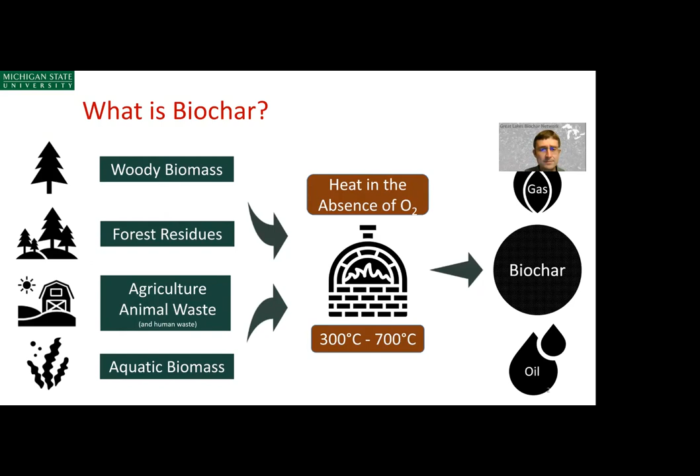As we move up this temperature range into the 400 to 600 degrees C range, this is where the technologies of pyrolysis are employed. They can be employed as either fast pyrolysis, which rapidly heats biomass in the absence of oxygen, or slow pyrolysis, which much more slowly heats biomass in the absence of oxygen for much longer residence times. Fast pyrolysis residence times are on the order of seconds or less. Slow pyrolysis residence times can be minutes to hours to days.

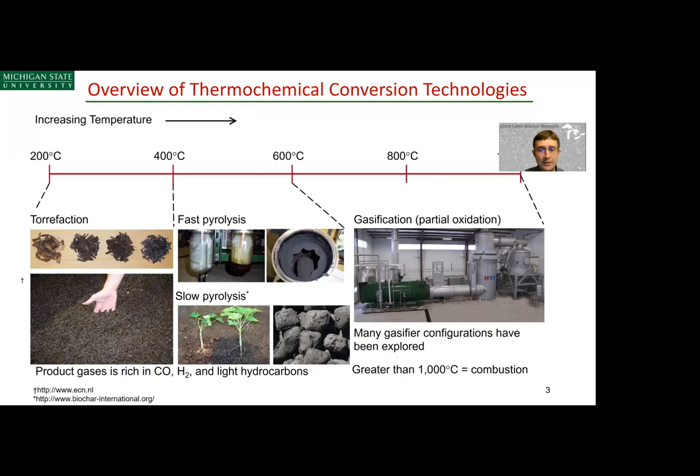So focusing on pyrolysis, this begs the question: how does pyrolysis occur? The truth is the mechanism is very sophisticated. Pyrolysis reaction chemistries are quite complex. There are a number of different reaction pathways followed from the carbohydrate polymers of biomass, including cellulose and hemicellulose, as well as the lignin component of plant biomass.

Fred Shafizadeh proposed a model in the late 70s, early 80s that describes wood pyrolysis. He suggested that pyrolysis proceeds via three routes: one route to char, which is our interest here today, another route to tar, now named bio-oil, and a third route to combustible gases. These combustible gases are sometimes called non-condensable gases - the gases left over after you've condensed the pyrolysis vapor to form bio-oil. There are also routes from the bio-oil to combustible gases and to char, so there are secondary routes that can produce more biochar and more combustible volatiles.

So this mechanism was useful because it helped us untangle what might be happening during pyrolysis mechanistically. Though today we've made rapid strides in our understanding of pyrolysis, we still have a ways to go. We care about these mechanisms because if we know the kinetics - the rates at which reactions occur - we can use that information to better design our reactors.

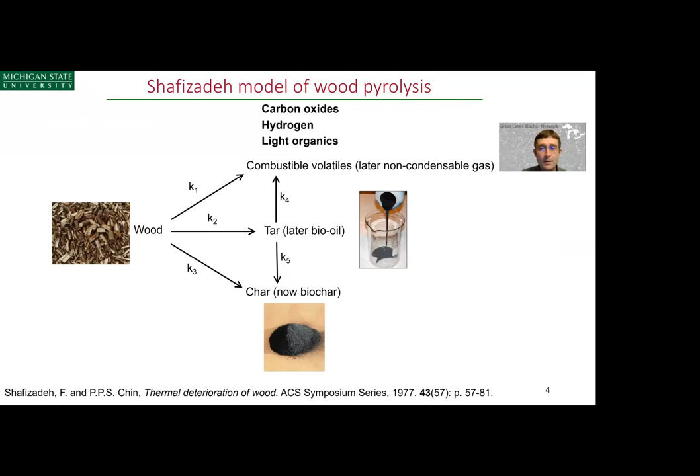Now we couple these rate equations that we can formulate from the kinetic models with heat transfer rates and mass transport rates. When we do that, we can better understand the entire physical chemical process of pyrolysis.

It's important that we understand these mechanisms, particularly the rates at which these vapors move through the char layer, because embedded in that char layer are the metals the plant had transported from the soil. Some of these metals are quite catalytic and can catalyze a number of other reactions that proceed to form products collected in your pyrolysis vapor, or they can catalyze the formation of chars. Understanding what's going on is really important because now we can design better reactors using that understanding. It helps us de-risk reactor design.

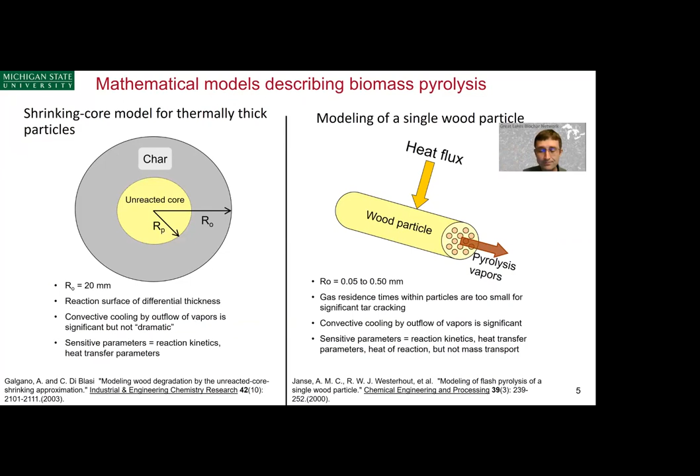I'll point out these earthen pit kilns are covered with soil, usually sandy or loamy soil. It's important to make sure that as this kiln operates, recognizing that the biochar volume reduces, you fill in any cracks or fissures that form, because those cracks and fissures will allow fresh air to infiltrate and cause combustion to occur. So this isn't something that can be done for 20 to 30 days without monitoring. It does take frequent monitoring to make sure that anoxic conditions - those are conditions in the absence of oxygen - are held.

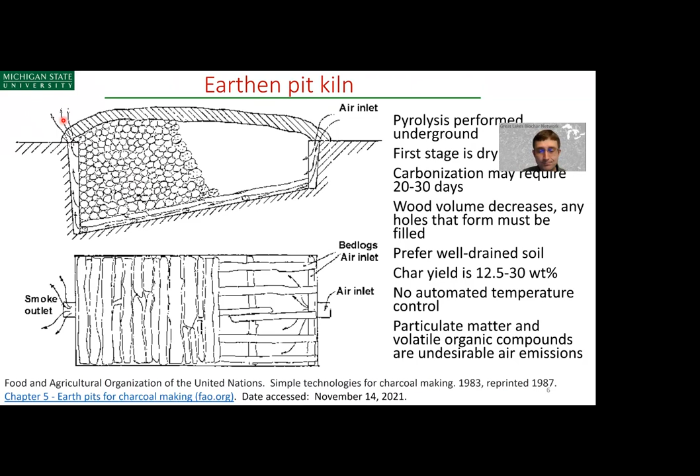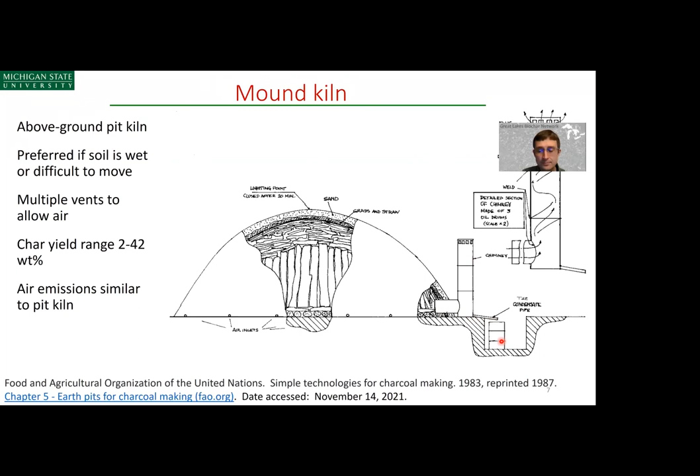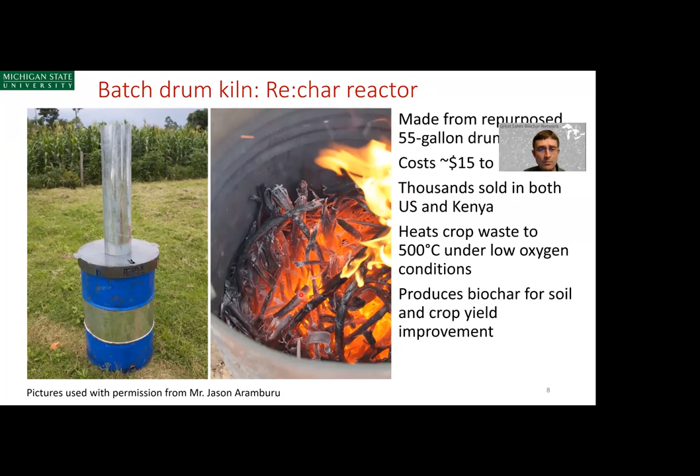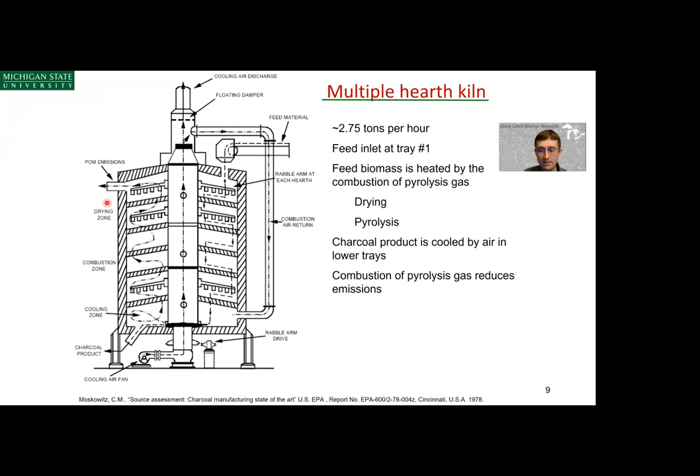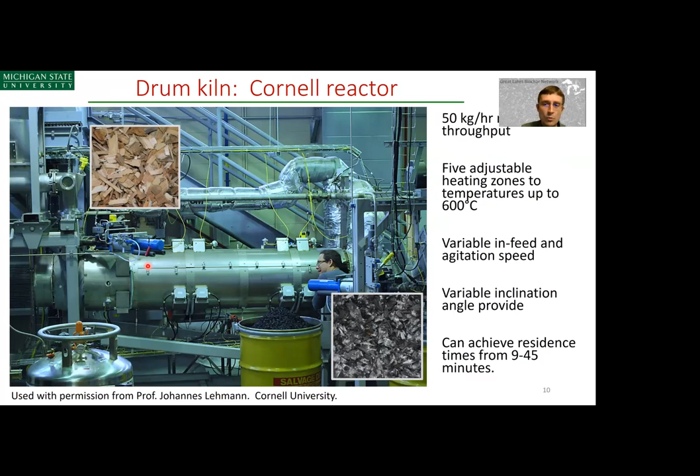So they can control residence times between a low of 9 minutes to 45 minutes in this particular drum kiln. There's some control of residence time, one of the key operating variables, and control of temperature, another key operating variable, as well as the feedstock flow rate. Because these types of reactors are highly instrumented and highly controlled, you can achieve biochars with more desirable properties than you might otherwise be able to.

The pyrolysis vapors are then condensed to form bio-oil, which is the liquid fuel intermediate to hydrocarbon fuels, and then biochar. You typically don't get the same yields of biochar with fast pyrolysis as you do with slow pyrolysis, on the order of 15 to 20 weight% for fast pyrolysis, whereas you can get 35 to 40 weight% biochar yields with slow pyrolysis. Nevertheless, if liquid fuels are needed, and if liquid fuel economics from fast pyrolysis systems can be supported, biochars could be produced in relative abundance because of the magnitude of the demand for liquid fuels.

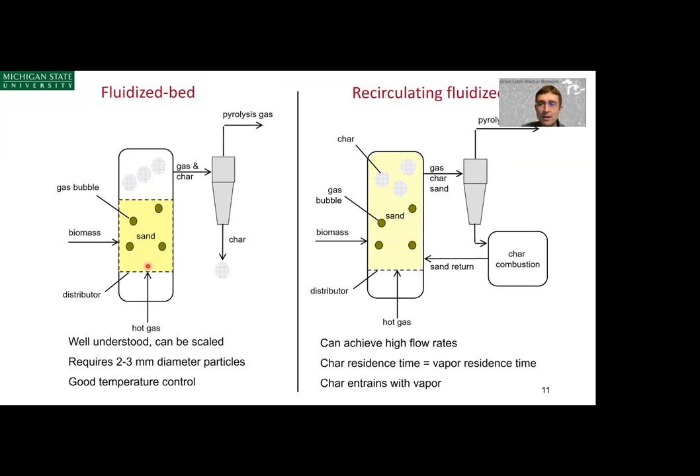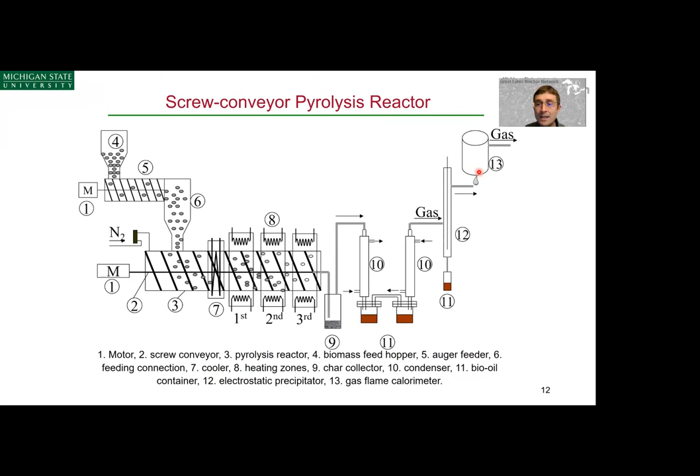We don't use sand as a heat transfer medium. Instead, we use the externally heated wall of our reactor as the source of heat transfer. The vapors are then condensed through 2 condensers, and recognizing that even after condensation we have aerosols in our gas stream, we run the stream through an electrostatic precipitator, which strips the remaining aerosols. From there, the gases come out and go into a flame calorimeter where they heat water, a known quantity of water, and then we can record the temperature rise to calculate how much energy the gas stream has, recognizing that we would want to use that gas stream as a source of heat to heat our reactor. And here's a picture of that reactor setup.

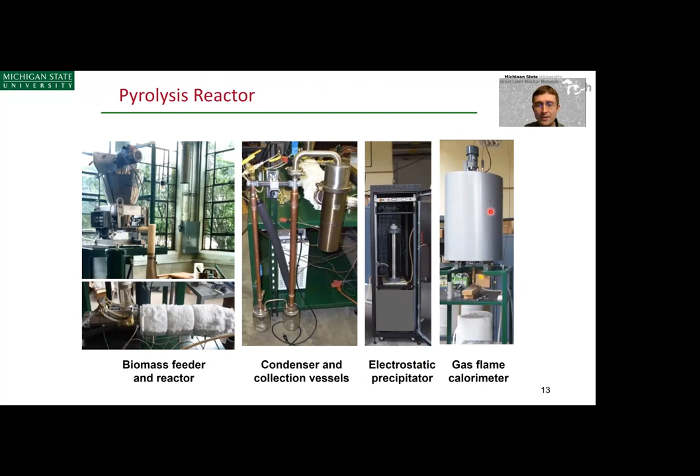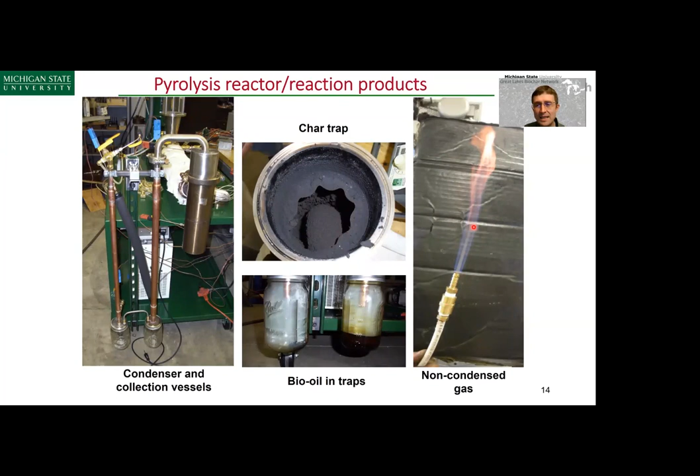Looking down the biochar trap, if we take the top off, you can see that we collect biochar there, and we typically get yields, well, as low as 12 weight% and as high as 25 weight% in this particular device. And the non-condensed gas is combustible, as you can see here.

So just in review, starting with torrefaction, this is the low temperature version of pyrolysis. We do get a relatively high solids content. That material is really for displacing coal at coal-fired power plants. Though you get a high solids yield, there's still a lot of unreacted biomass in the torrefied biomass product that you produce, and that unreacted biomass would include things like carbohydrate polymers, cellulose and hemicellulose. So often we don't consider torrefied biomass as a source of biochar for soils. Instead, we look to fast pyrolysis and slow pyrolysis for doing that.

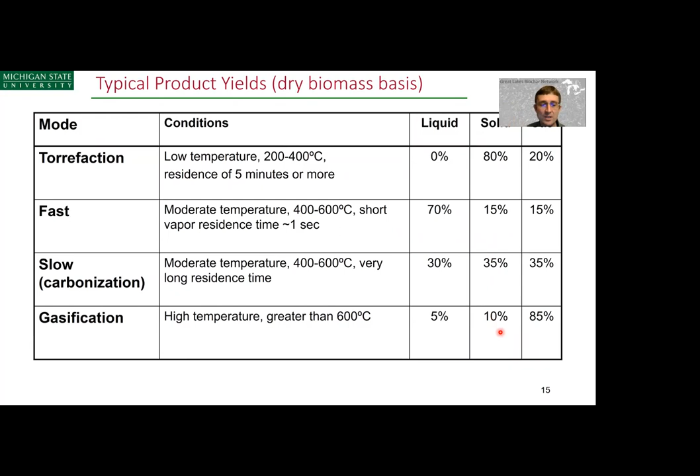Fast pyrolysis biochar yields are about 15 weight% or so. Slow pyrolysis biochar yields are about 35 weight% or so. Yes, you can derive biochar from gasification in the order of 10%, but we just have to be a little careful as to what sorts of organic contaminants that biochar might contain because of the high reaction temperatures we exposed that solid material to.

There are a number of biochar applications that we need to be aware of that go beyond its agriculture use. Of course, heat and power is one use - we could burn biochar, make heat and power. There are a number of future uses that involve the building sector, and this owes to biochar's low thermal conductivity, its low flammability, its high stability.

We can use biochar as a catalyst. We use it as an electrocatalyst in some of the electrocatalysis work we do to upgrade pyrolysis bio-oils. There is some evidence that it serves to replace sulfuric acid in biodiesel production. Animal feed additives is another area of application. There's evidence of increased gut health, increased feed efficiency, toxin absorption, as well as decreased methane release, very important for the cattle industry.

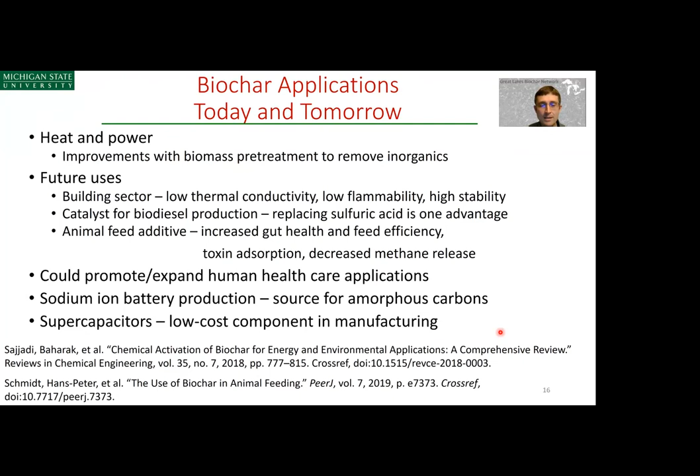There are human healthcare applications that can be expanded upon with biochars, and then some more unique applications like sodium-ion battery production, where amorphous carbons are needed, or the production of supercapacitors. So there's lots of different directions biochar is going with regard to end uses for it.

A number of folks have wondered about different activation techniques. Classically, biochar is activated most often by steam, where the steam is usually high pressure, high temperature steam. What this serves to do typically is increase the surface area of these biochars to make activated biochars or activated carbon. Having activated carbon is important because it'll increase the adsorption and removal of such contaminants as heavy metals or dyes or oils from water streams or from air streams.

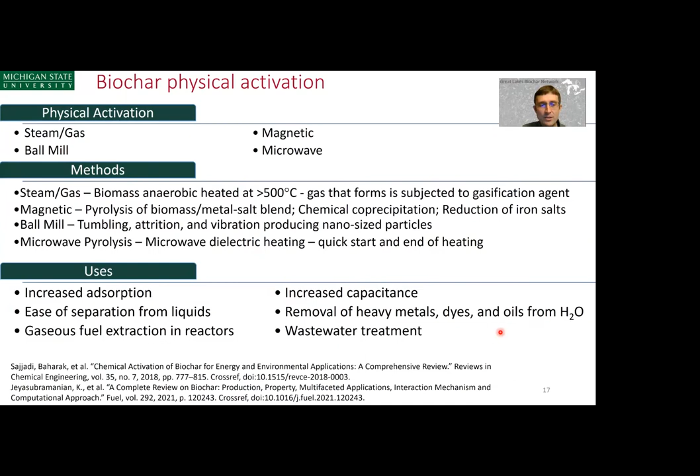Very important for wastewater treatment. Classical activation involves perhaps steam, or other gases like carbon dioxide can be used as an activating agent as well, and there are a number of other physical methods used for activating biochars. It's not just about increasing surface area, however - changing the functional groups on the surface of biochar can also be desired.

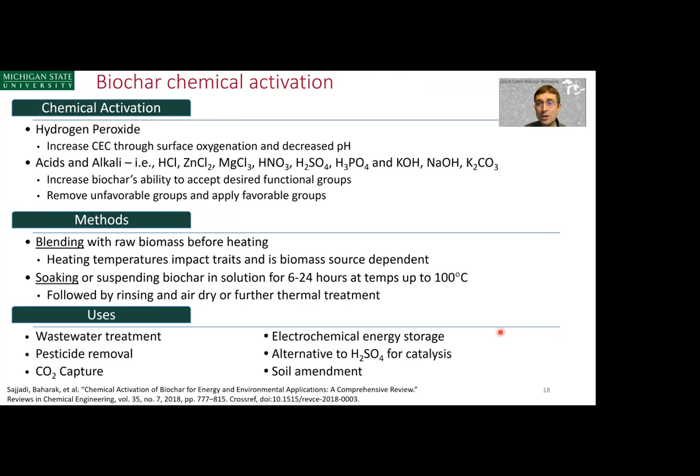For example, you might elect to increase the cation exchange capacity by oxidizing the surface of biochar using hydrogen peroxide, in which case you're using a chemical activation approach. There are a plethora of chemical activation approaches involving acids and bases, where the goal is to change the types of functional groups, to add or subtract functional groups from the surface of biochar. There are lots of end uses for these, from electrochemical energy storage to pesticide removal. It can improve biochar as a soil amendment, for example, if you increase the cation exchange capacity.

There are biological activation mechanisms used as well. Composting is an example—you mix the biochar into a compost pile for weeks to months, and what you end up with is a biochar that can improve soil structure and soil properties. You get some increased water availability, and some evidence of decreasing nitrous oxide and methane emissions from field applications. So there are biological activation methods that are of interest to those of us in this field as well.

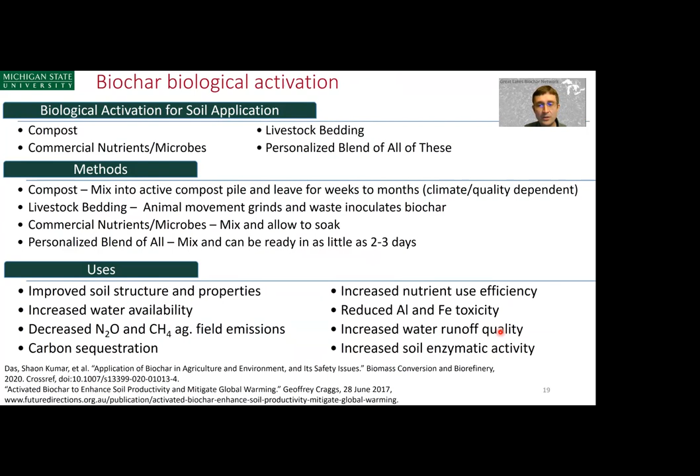So even from the same feedstock, biochars produced under different operating conditions will be different. Here's a study by Bruun et al., published in Soil Biology and Biochemistry, using wheat straw as a feedstock. They examined 4 treatments: a soil control with no biochar added, a treatment adding slow pyrolysis biochar at 5 weight percent in soil, another adding fast pyrolysis biochar at 5 weight percent, and a final treatment that just takes raw, untreated wheat straw and adds it at 5 weight percent in the soil.

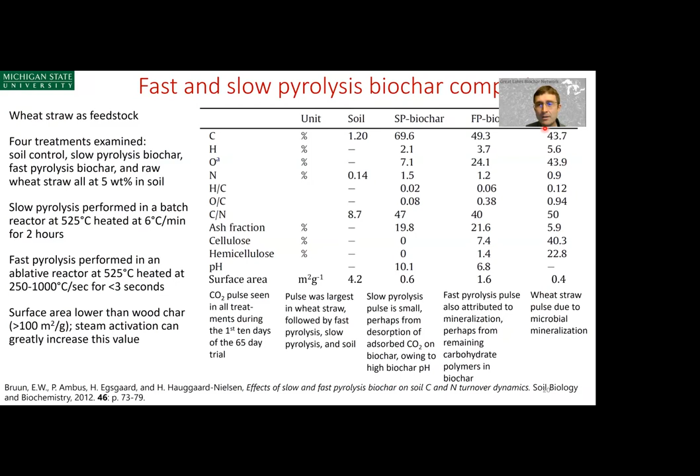The slow pyrolysis biochar was produced under different conditions than the fast pyrolysis biochar. The heating rate was much slower, at 6 degrees Celsius per minute versus 250 to 1,000 degrees Celsius per second. The heating time was 2 hours for slow pyrolysis versus less than 3 seconds for fast pyrolysis. Then they looked at some of the properties of these different biochars and compared them.

Looking at the carbon content, the slow pyrolysis biochar has about 70% carbon content, whereas the fast pyrolysis biochar is at 49%, only slightly higher than the untreated straw. The oxygen contents are also very different: the slow pyrolysis oxygen content is about 7%, and the fast pyrolysis oxygen content is 24%, both substantially lower than the 44% oxygen content of the original wheat straw.

The ash fractions are about 20% for slow pyrolysis and almost 22% for fast pyrolysis, so they're not too different from each other, but they are quite different from the original wheat straw. That's because the biochar concentrates the inorganic component, the inorganic fraction of wheat straw, into itself. The inorganics typically aren't volatile, so during pyrolysis they just become a fraction of the biochar.

Cellulose and hemicellulose does remain—there's a small amount of these carbohydrate polymers present in the fast pyrolysis biochar, but none present in the slow pyrolysis biochar. The pHs are also different: the pH of slow pyrolysis biochar is relatively high at 10.1, and about neutral for fast pyrolysis at 6.8.

Interestingly, the surface areas aren't that high. We tend to think of biochars as having high surface area, but these surface areas are actually quite low from both of these processes—quite a bit lower than wood char pyrolysis, which is typically around 100 meters squared per gram. So something's different about wheat straw than biochars made from wood. Now, if you employ steam activation, one of the physical processes we talked about, you can greatly increase these values.

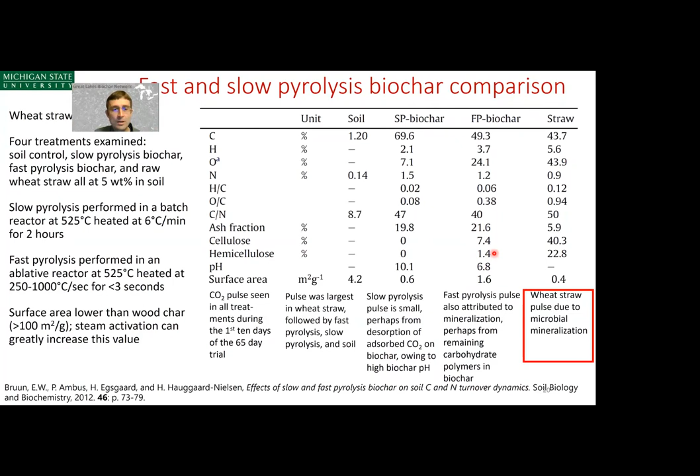This slide serves to impress upon you that biochars, even from the same feedstock, have different properties when land applied. That owes, at least in part, to the physical chemical properties of the biochars as made by these different processes.

Air emissions are important to discuss. Recognize that fast pyrolysis air emissions will be different than slow pyrolysis air emissions. There are lots of organic constituents in both slow and fast pyrolysis emissions. I will say that the slow pyrolysis vapors tend to have higher contents of carbon oxides like carbon monoxide and carbon dioxide.

Considering slow pyrolysis air emissions, in an uncontrolled batch reactor, you can see the emissions in terms of carbon monoxide, methane, non-methane hydrocarbons, and total suspended solids are greater than if you work with a controlled continuous reactor. The controlled continuous reactor emissions are quite a bit lower. So your ability to control those emissions goes up with increasing automation. That's something to consider when it comes to regulating emissions and considering whether to practice at small scales or large scales.

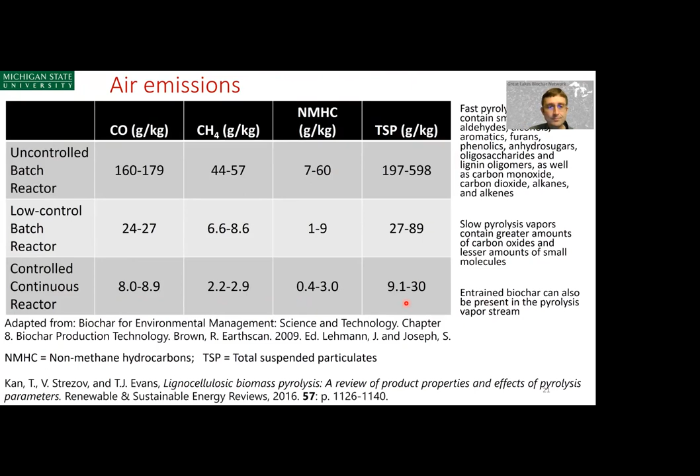The energy analysis of pyrolysis is also interesting. If we take corn stover, which is the leftover stalk and leaves of the corn plant after grain harvesting, and take 1 metric ton, and push it through this process of drying and pyrolysis...

Note, the amount of process heat needed for pyrolysis is not that great. You have to add some energy to raise the temperature to the ignition temperature of pyrolysis, but once it gets started, it's fairly self-sustaining, so it's not very energy intensive to run.

What they learned in this study was that dry feeds like poultry manure, horse manure, or dry cattle manures are actually reasonable feedstocks for this type of system, but wet feeds like dairy manure aren't, because of the need to boil water off the wet feed prior to performing pyrolysis.

They also learned that yard waste was a very economically favorable feedstock because you can charge a tipping fee, and that carbon credits are important. When they got to carbon credits amounting to $80 per ton of CO2 equivalent, that led to economic feasibility. They also found that the economics were favored for decentralized, distributed systems—smaller systems, perhaps farmer or forest cooperatives—where these systems are located near the feedstock, so hauling costs are minimized.

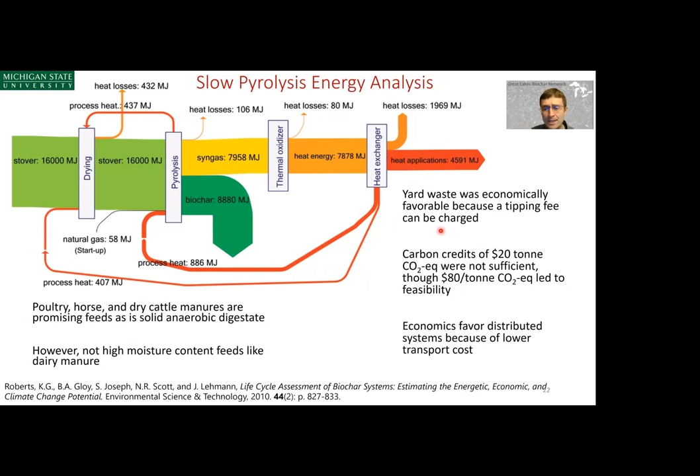Different researchers have looked at centralized facilities. This is an example of a large centralized facility processing 2,000 tons per day of dry corn stover. They used slow pyrolysis at 400 degrees Celsius and 1 atmosphere to achieve an internal rate of return of 10%. To get that 10% IRR, they needed a biochar selling price of $346 per metric ton. You'll see in a subsequent slide that the selling price of biochar is very important.

At $60 per metric ton CO2 equivalent, this equates to about $110 per ton of biochar. So that gives you an idea as to what carbon credit and additional value biochar has to have in order for it to be...

Accessible on the market. They performed this sensitivity analysis and recognized that biochar yield is a very sensitive parameter. If you increase the biochar yield from 36%, which corresponds to their 10% IRR down the center line, to 45%, their IRR approaches 20%. If the biomass cost is decreased to $55 a ton from $83 a ton, they also start to approach 20% IRR. If you can get a gas credit from the co-produced combustible gas, you can get IRRs of 20%. Fixed capital investment, if lowered from $113 million to $79 million, this also increases your IRR. You can see from this tornado sensitivity plot what variables most sensitively impact profitability.

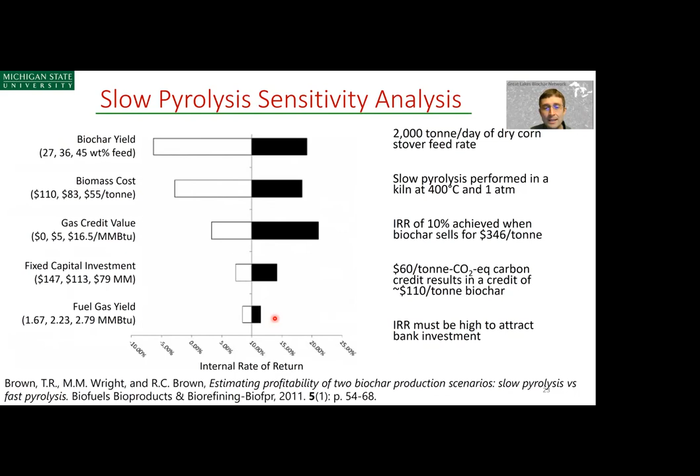Another study came along and looked at biochar selling price. They surveyed biochar selling prices back in 2013, and learned that prices range from $80 to $13,480 per metric ton. This is a very wide range of prices.

At least in part, it owes to biochar properties. The properties are different, so the value of the material is different. This group looked at four scenarios using two different reactor schemes. Scenarios A, B, and C all used an auger reactor, and scenario D used a hearth kiln reactor.

Scenario A co-produced biochar and liquid fuels, but didn't include RIN credits. By not including RIN credits, you can see their net present value tends to be below zero.

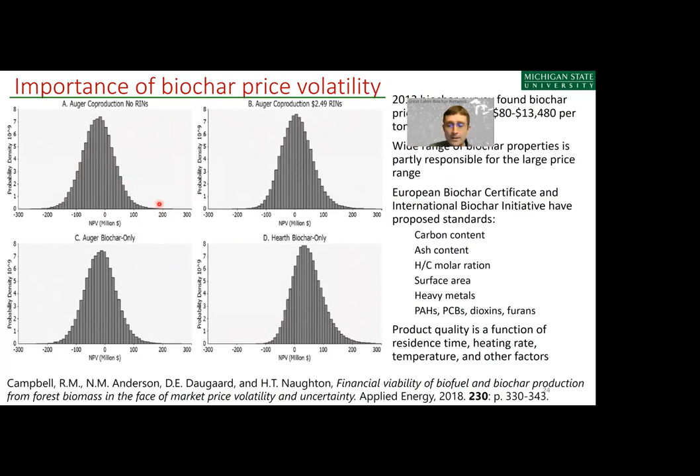These distributions are plotted here by performing a Monte Carlo simulation where they did 10,000 iterations with varied parameter sets, where each parameter was varied within its own distribution function. Upon going through all those iterations, they were able to determine the distribution of net present values that could be achieved for each of these scenarios.

Because scenario A's mean net present value is negative, more likely than not, this auger production technology without RINs wouldn't be feasible under the conditions of fuel prices imposed in 2018. We had low fuel prices in 2018.

In figure B, with auger production including a RIN credit, this shifts the distribution over to where the mean is now right at about a net present value of zero. If you only produce biochar in an auger, without a RIN credit because you're not selling liquid fuel anymore, the distribution shifts back to the left, more negative. This is because auger reactors are capital expensive.

If you come back to the hearth kiln reactor, which is less expensive to construct and implement, claim the authors, then this distribution shifts to the right. In panel D with the hearth kiln, more likely than not, you can make profit from such implementation. Again, this is for the economic conditions back in 2018, which we don't have today in 2021.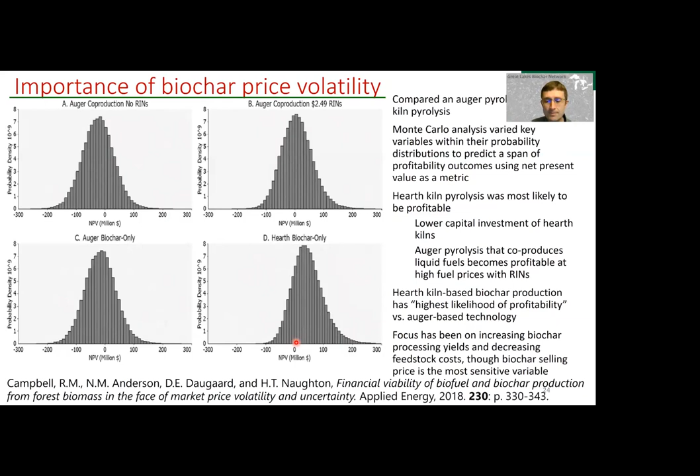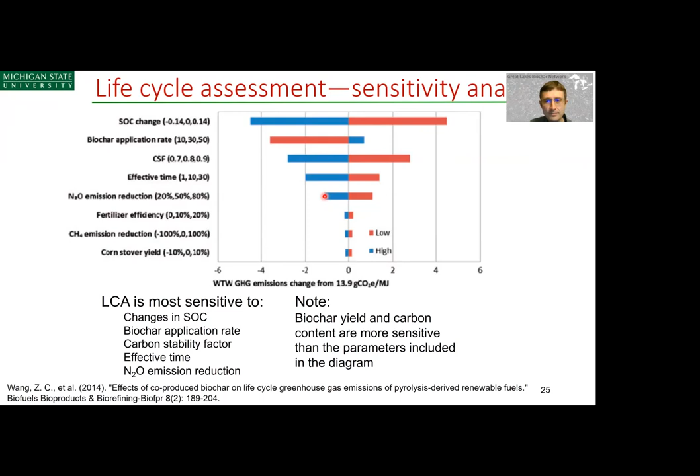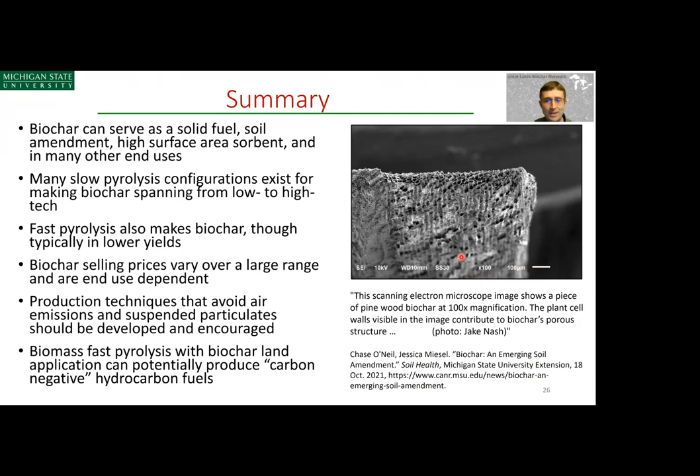Great, if there are any questions, I think we can take them. Looks like there's some questions in the chat popping up. Should I start from the top, Brooke, or would it be best to start at the bottom? Whatever way you'd like to take them. There's also one in the questions and answer forum. Oh, okay great, thanks for pointing that out. So we'll start at the top.

It says here, any data on using biochar on lake shores? I suspect what you're suggesting is maybe these applications where you see biochar put in sleeves or socks, packed in such a way to treat nutrients or unwanted metals along shorelines. I've heard of doing that with rivers contaminated with things like PFAS. There's precedent for those sorts of applications, if that's where the question is headed. If you're talking about just blending biochar into the lake shore itself, I don't know that I'm aware of that. Maybe one of the soil scientists would be able to pick up with that one.